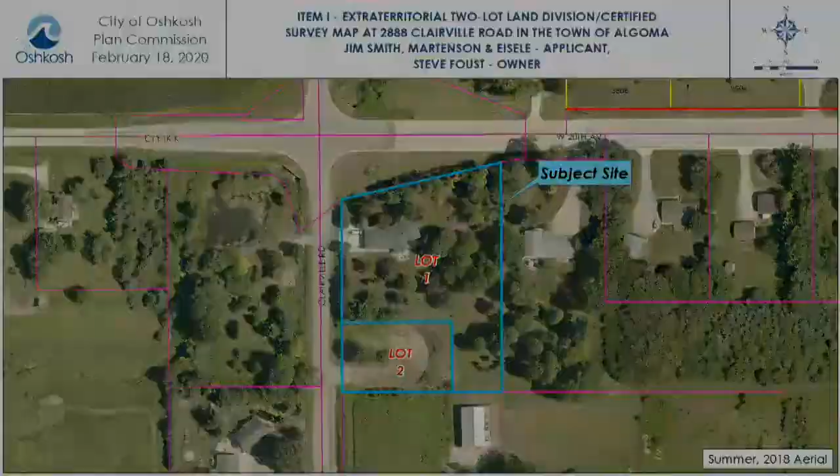One item to note on this site—go to the next slide here. We should all be familiar with this: the current floodplain letter of map amendment pending with Winnebago County. The site was affected by floodplain through the 2003 FEMA floodplain insurance program. With the work the city's done in the Sawyer Creek area over the last 15 years, and the modeling done by Strand, it removed the entire property outside of the 100-year floodplain.

Now the holdup is with the flood storage districts. If the county does not approve the flood storage districts, it will again impact the property, putting the proposed lot 2 entirely within the 100-year floodplain. The consequence of that is they could still potentially build a house there, but the house would have to meet floodplain engineering standards, and they would have to conduct an engineering survey to determine the impact on the floodplain upstream of the subject site.

The city's comprehensive plan recommends this area for light density residential, so the proposed land division is consistent with the comprehensive plan. The Department of Public Works reviewed the proposed land division and shared the same concerns regarding the floodplain. So with that, staff is recommending approval of the 2-lot land division at the southeast corner of 20th and Clairville as proposed.

Thank you. Technical questions from the commission? John? If Clairville is expanded, I don't know what the plans are for that, but would the lot change at all size-wise? Would it make it a less than desirable size, where that back portion would be included now? Once this area is urbanized as it comes into the city, Clairville would be expanded to a more urbanized roadway. At a half an acre, it vastly exceeds the minimum lot requirements for the city, so if that happened I would not anticipate it being a concern.

I don't know, Justin, is there any— Well, Clairville is a collector street, currently a 66-foot wide right-of-way, so it'd be unlikely that the city would require any additional right-of-way from either side of Clairville. So it's sized appropriately. Other technical questions?

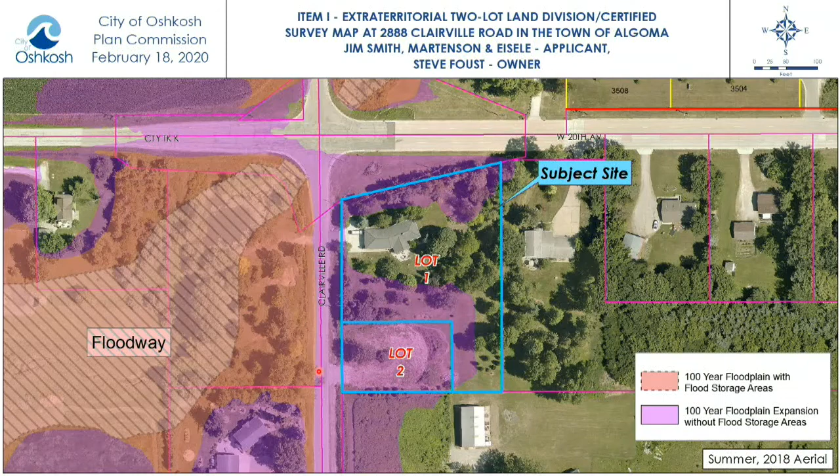But if they deny it, Lot 2 would be completely within the floodplain and have to meet floodplain standards and flood insurance. Then it would be up to you if you wanted to have a floodplain survey done just for your property — you'd have to incur the expense to have a consultant come out there and go through it.

Understand that. What I'm saying is that Lot 2 has been raised physically 2 feet plus out of the floodplain. I just haven't had Martenson and Eisele file the paperwork yet — they haven't done a letter of map amendment for you. Well, hopefully they won't need to.

If the county approves the flood storage districts, you won't need to do that letter of map amendment. If they do not, then it would probably be in your best interest to have Martenson & Eisele do that letter of map amendment. Very good.

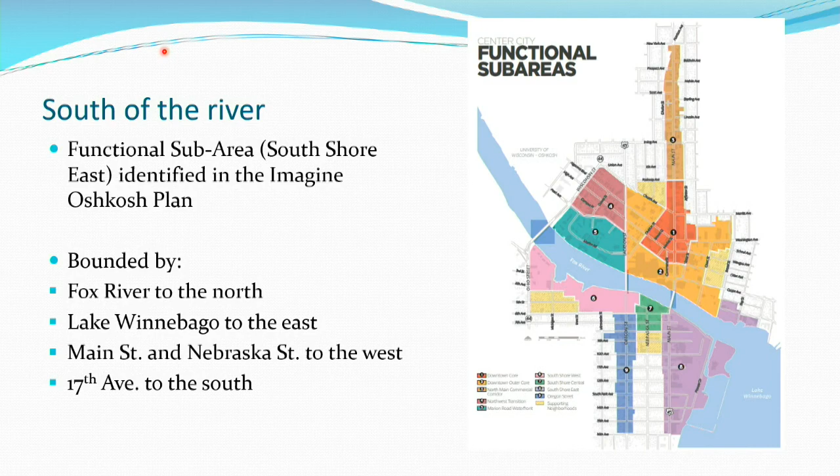This originated as a functional sub-area of the Imagine Oshkosh Master Plan, which was adopted in 2017. You can see this map shows a little bit more perspective of where it is south of the river on South Main Street.

For a little history and background, we developed a plan called the Imagine Oshkosh Plan in 2017. That area was more of a greater central city area. Within the plan there was a functional sub-area, called the South Shore East District.

From there, we decided to work on the Sawdust District area. It also helped with the elimination of the Buckstaff property and also helped attract the Menominee Nation Arena, South Main.

At the beginning of the planning process, we developed and put together the Sawdust District Advisory Group, compiled of a variety of stakeholders in the area, like property owners or business owners. We met as needed with that group, and they reviewed all the work that we put together as staff, including the project area boundary, the vision statement, and preferred land uses throughout the district.

I have an image of the actual vision statement that we put together. This was all reviewed by that advisory group. I'm not going to read the whole thing, but you can find that on page 10.

From the vision statement, we extracted these guiding principles to help us make decisions for each of the land use districts. The guiding principles include developing a mixed-use district. Mixed-use development was the main focus.

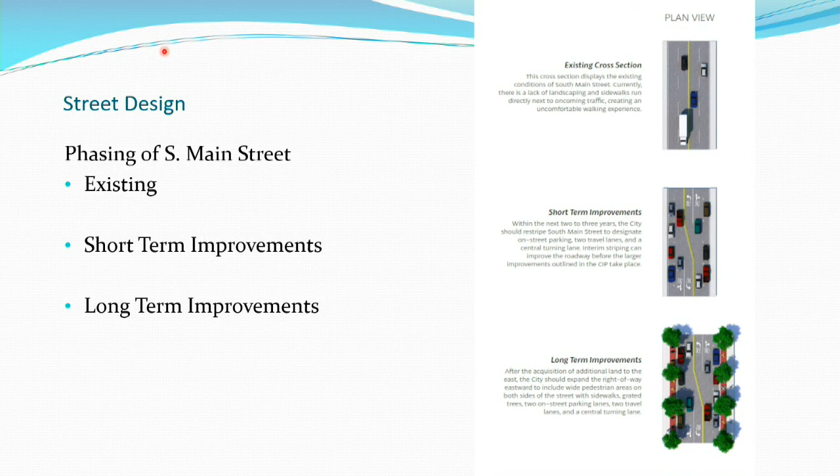Then the long-term improvements, which would match the plan. The long-term plan would be 20 to 30 years, even 25 years. That would include adding some street trees, terraces to separate the roadway from the pedestrians on the sidewalk, on-street parking again, and then a center turn lane.

We also recognize that the entire corridor isn't all the same throughout. On the northmost section, 6th Avenue to 8th Avenue, there's more of a limited right-of-way. If you remember, there are some existing buildings that we probably would prefer to stay because they're currently being used and they're functional.

So there is limited right-of-way there, so that would stay as is. It wouldn't be as wide. It would probably remain at the 60-foot right-of-way, and hopefully we could add some terrace trees to make that improvement.

And then when you go further south from 8th Avenue to South Park, we have more options. As development occurs, we could potentially acquire some land and increase that right-of-way width, similar to what you see along where the arena is, with wider sidewalks and a wider right-of-way, making it feel more friendly for pedestrians and visitors.

And then there's the transition zone that goes from South Park down to 17th. We view this area as a gateway, but also a transitional area that is more car-oriented, and we would probably keep that two lanes in each direction.

So in closing, just to get to questions, staff recommends approval of the Sawdust District Plan as requested. I can go back to the map for more.

Okay, thank you, Alexa. Technical questions?

For the existing roadway and the short term plan, I'm not seeing designated bike lanes or anything on that. Is that intentional?

One of the things we analyzed was whether it was appropriate to have bike lanes on South Main or not. Reviewing this, with the orientation of the roadway and the uses of the area, we already have parallel routes in the bike and pedestrian plan, for example down Nebraska. We felt it was most appropriate to use Nebraska since you're going to have the Riverwalk on the east side of this district, so having facilities on both sides instead of paralleling Main. Also, the southern part of the district would be difficult due to right-of-way constraints. One of the biggest concerns we heard with South Main Street is there is no parking, and you can't have commercial business thrive when there's nowhere to park.

So we were trying to balance whether to put a bike lane on one side and parking on the other. Talking through with the advisory group and stakeholder interviews, the feeling is parking is probably the biggest need. If we can still achieve bicycle and pedestrian facilities through parallel routes for bikes, enhancing the pedestrian orientation along Main would probably be a better overall use for the area.

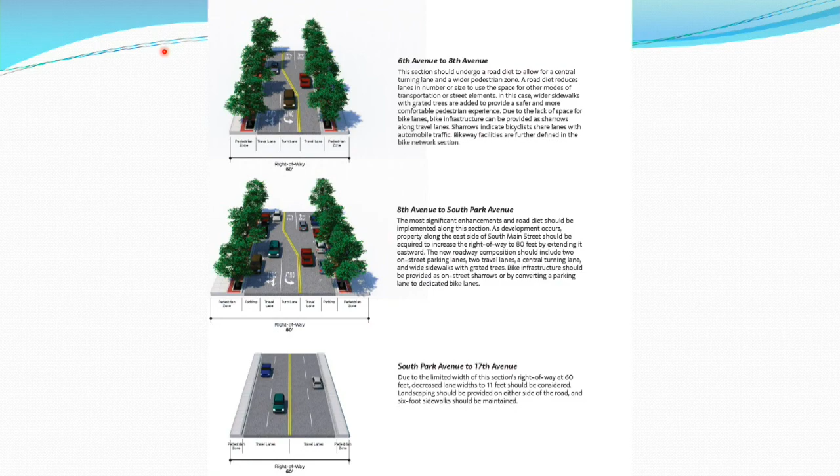How does the bridge fit into this? We spent some time in this group talking about the bridge and how the Main Street Bridge fits into all of this. It's not technically in the district, I suppose, but it seems like the bridge could be a cool component to all this.

Yeah, if you remember, we took it off this plan because for a while we had it as a bike and pedestrian bridge over the river as well, but felt that probably wasn't realistic at this time.

Alan, anything to add on that? Just as a follow-up, I believe the Oregon Street Bridge is the first one to be replaced, sometime in the next 10 years, and then Main Street could be 25 to 50 years out. I'm not sure they have a deadline or timeline on that one.

But I can tell you the Fox River Corridor Plan, at some point, we want the river walk to go under the bridge and continue along, rather than crossing at that grade.

Other technical questions from us?

Justin asked: after it's approved by this board and by the council and RDA, how fluid is it? Can it still be amended and changed, things added and removed, or is that what we're doing? It's a guiding plan. Obviously, any development that comes in is going to have to be evaluated based on the merits of the development. We anticipate we may look to plan development zone a lot of this area for development in the future. Does that make sense? It's a guiding plan, not a black-and-white stone ordinance.

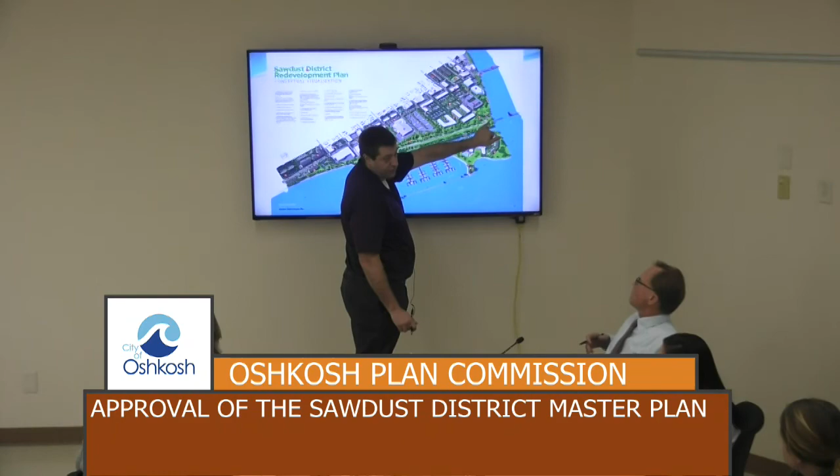Michael asked about the reference to changing or replacing 9th Street — what would that look like? It would be the extension of Ninth. Ninth ends here. The current thought is to take it and wrap it into where the existing railroad crossing is, where Pioneer Drive is today. So it'd just be that extension, weaving it back in.

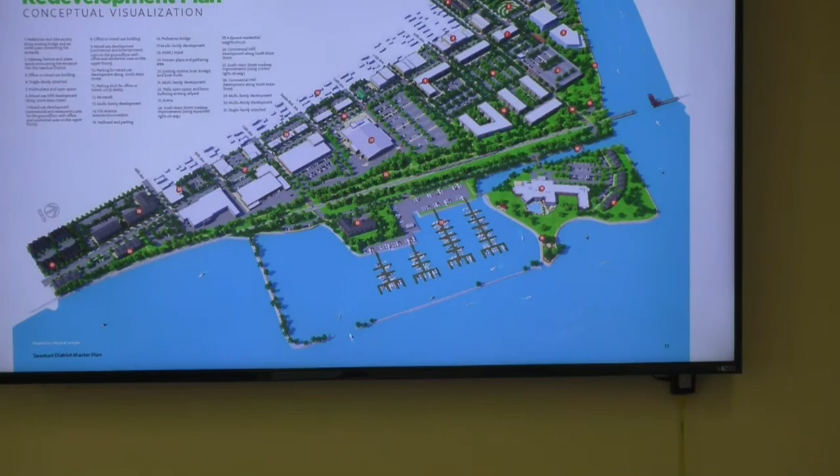John and Mike, then Justin. It's a very nice plan, thank you for all the work that was done on it. When I look at it, I see a lot of housing, maybe some larger type businesses, industrial as we go further south, but what's the destination thing? What's going to draw people to come here, or people that do come to the Pioneer?

Is there an opportunity to put some businesses along the river walk, where they could walk during the appropriate time, or all year round, but mostly in the summer months or warmer time of year, and get ice cream or go to a coffee shop or something along that line?

A couple of things — we envision the goal is to create South Main similar to North Main, where you have that pedestrian-oriented business, walkability, the entertainment or arena district, looking to build on what the arena already has with some more entertainment type event spaces or uses that are going to draw people in. That's kind of the goal of those two areas, is to bring people in.

And then when you look at, for example, the River North District, it's looking at more of maybe adding some rooftops, whether apartments, condos, mixed-use development. So trying to combine that live, work, play — we have residents being added to the area, but then also focusing on some of those service and commercial uses that they're going to want in the area.

Another way we're trying to draw people to the area is there are two shown trailheads for people to come from farther out of the area — one to the south and one to the north. It's another way to activate people coming into the area using the river walk, hopefully coming to some of the local businesses.

You might envision the one further south being a spot where people could rent kayaks or paddle boats, that kind of thing. Some of what's talked about within the actual plan is focusing on river- and lake-oriented businesses and activating those waterfront uses. We've had people talk, for example, about a water taxi, adding something like that to the area. The developers of Pioneer Island are also looking at adding some of that stuff.

For example, when we're working on the Pioneer Drive Riverwalk design, Pioneer Drive is basically concrete for the entire right-of-way. So we're looking at getting rid of all that concrete and putting in natural features and vegetation, as well as possibly removing and restoring that shoreline. But it's hard for me to say above and beyond that what we're going to do with everything else in that district.

I can tell you most of that area is environmentally impacted one way or another, so I expect there are going to be a lot of things that DNR and EPA are going to require us to do regardless of what we think, when it comes to remediation.

Last but not least, along the Pioneer and railroad right-of-way corridor, we're going to have a lot more plants in that area. So I think that's a great opportunity for native plantings, vegetation, and swales for stormwater management. We haven't done a stormwater management plan yet, but we know we're going to have to do that for that whole area.

This plan doesn't necessarily override previous plans we've done. For example, the Fox River Corridor Plan, one of the documents we reviewed, already has some of that discussion in it and will still be factored into development. We don't just look at the Sawdust District Plan as development moves forward—those other documents are still vitally important.

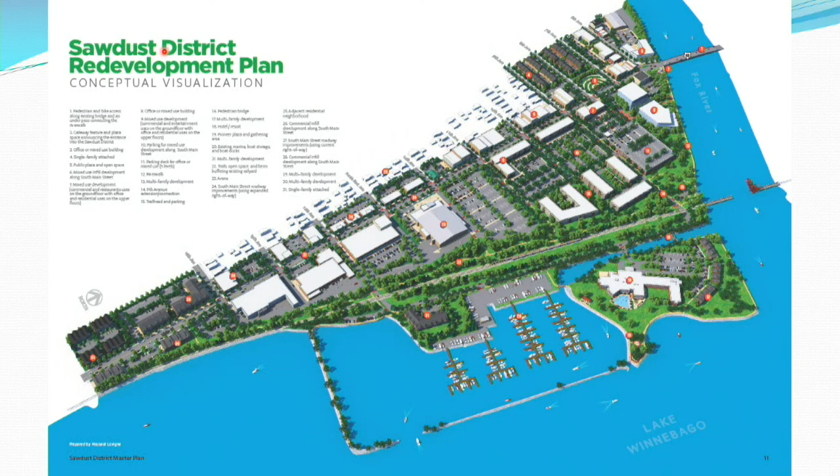Sure, I appreciate that. Other technical questions? We're getting a bit general here—could you expand a little on, besides the advisory group, what other opportunities either residents or business owners had to have input?

Definitely. So we did stakeholder interviews as well—we sent out requests asking specific stakeholders if they'd like to come in, and we met with them one-on-one, interviewed them, asked what their vision was for the area, and if they had any parcel-specific issues they wanted to share with us that we didn't know about for their business.

That was last winter. We sent a notice to every property owner within the area, twice—a mass mailing for the whole area, and then again just for this adoption process. We mailed it out to everyone and invited them to the open house.

We also met with the chamber—we presented to the chamber and then to the economic development group for the chamber. We're going to go to the Rotary Club, and if Kathy's not here, the plan is to go to the League of Women Voters as well.

Those meetings—are they all going to be done by February yet, or what's the timeline? The Rotary and League of Women Voters haven't happened yet. We've met with the chamber and the chamber's economic development committee, once in January and once in February. Rotary, I think, has it scheduled in April—it's hard to get on their timeline. And League of Women Voters similarly said they're already booked up through March and into April, so we're anticipating going to them sometime in April.